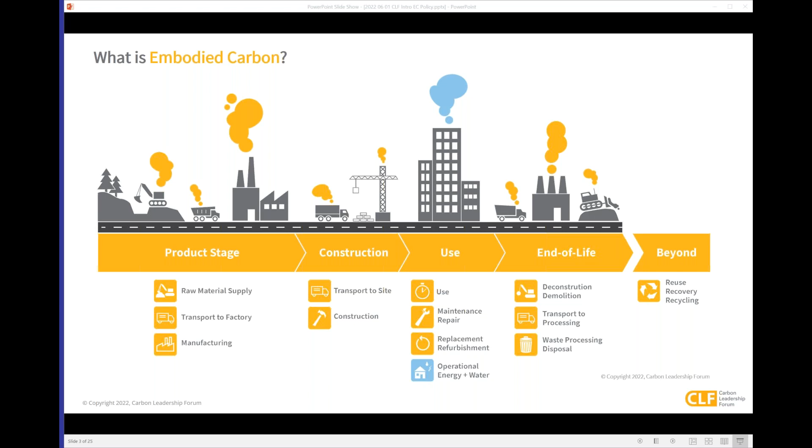I'm still getting a note that says nobody sees my slides. Do you guys see a slide that has factories on it? Not yet, no, we can just see a sign that says constructing and operating buildings has a huge environmental impact. There we go, what is embodied carbon is at the top. Okay, so I think I have to click two buttons twice every time I advance the slides. So let's...

When we look at a building per se, the total carbon impact of a building is the embodied carbon of making it and the operating carbon of operating it.

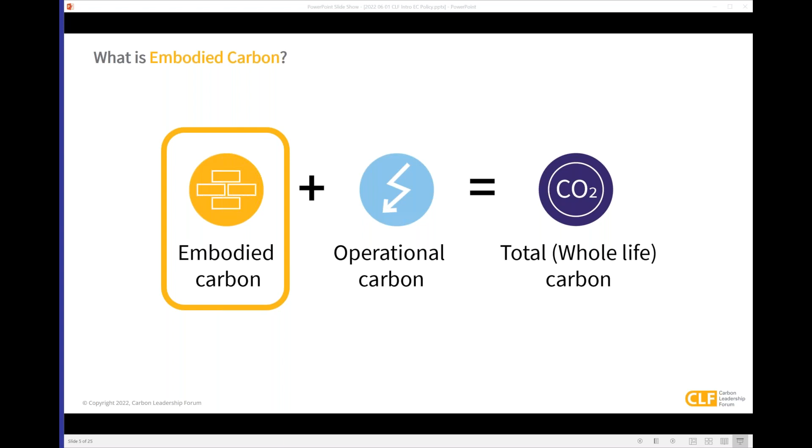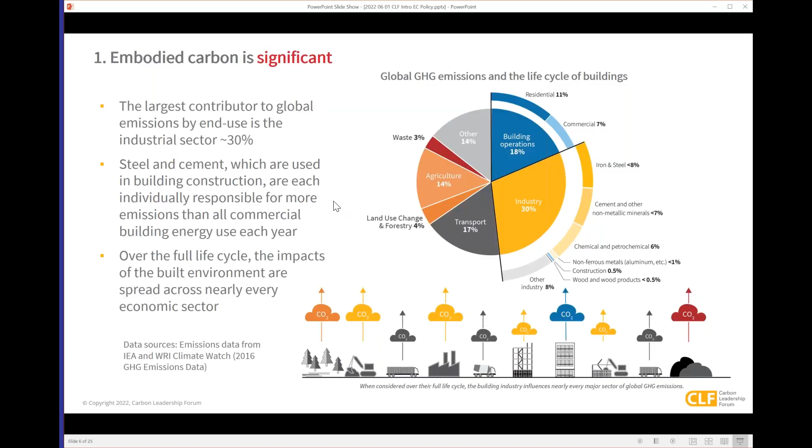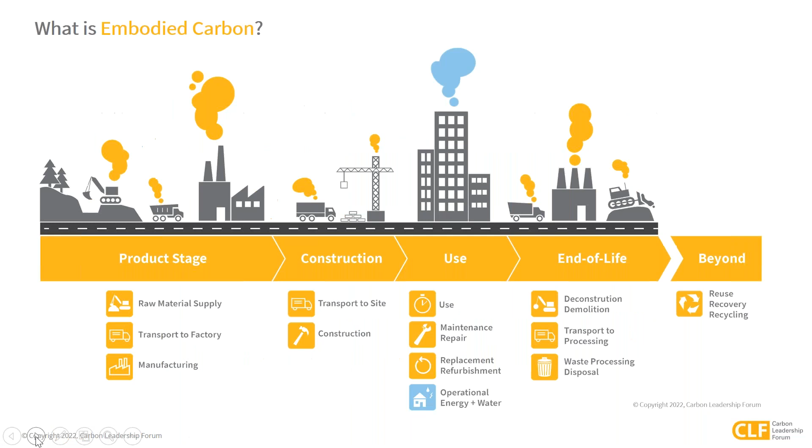We're not on your slide, Kate. I'm sorry to interrupt you, but we're okay. There it is, stop for a second. Okay. We're on the slide now with the pie chart I think you were talking about. Okay, I'm just trying to restart it because I think something's funky. Now, do you see my intro slide? Yes, yes. And now are they moving regularly? Yes. Now, and you see the pie chart? Yep, okay, yes, we can see the pie chart. Thanks, I think this will work now.

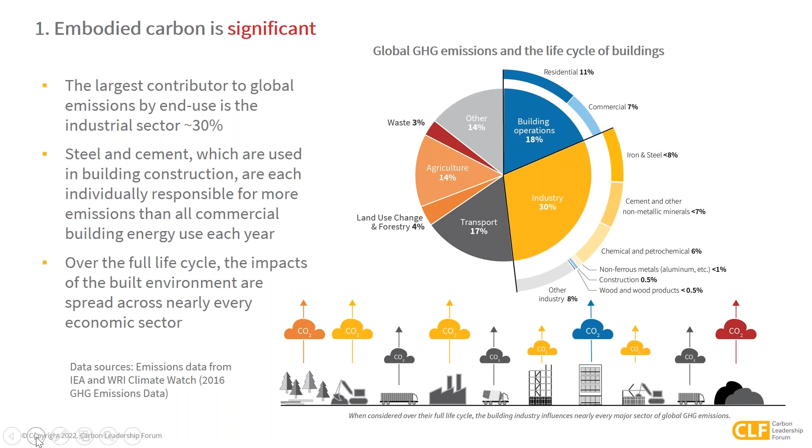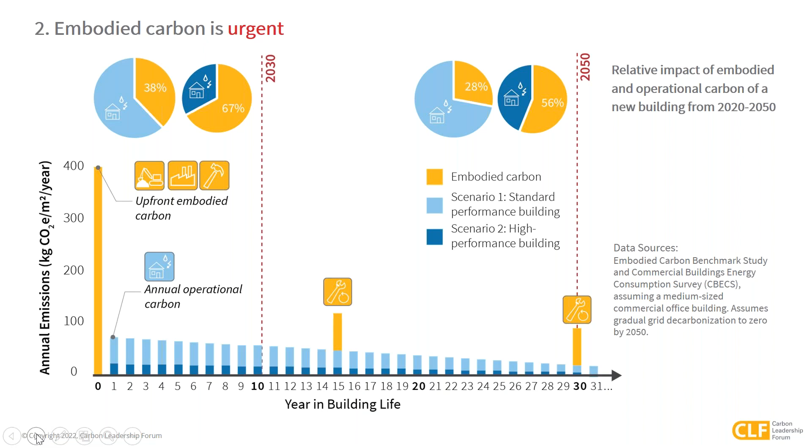When we look at buildings in particular, the focus on reducing embodied carbon is really important because those embodied or material impacts happen up front when we first make a building. The upfront emissions happen in year zero, and then the operating emissions happen over time. So if we're looking to meet global greenhouse gas reduction targets, we need an increased emphasis on the impacts of materials. Additionally, the impacts of material manufacturing are disproportionately impacting frontline communities. When we track reducing emissions from manufacturing from a global greenhouse gas emission perspective, we're also looking at the emissions that are more impacting of local communities as well.

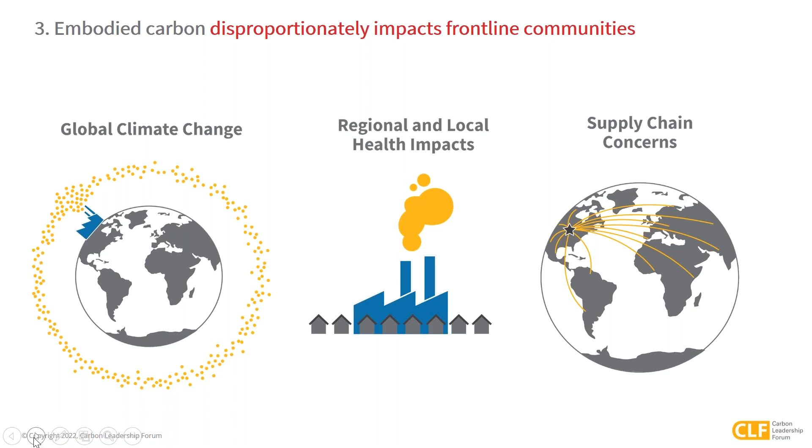So when we're wanting to reduce embodied carbon emissions, there's 4 general strategies to do so. One is to build less. If we reuse existing buildings or build smaller buildings or less infrastructure, then we are using less materials and thus less impacts. We can also design lighter and smarter.

So design and engineer to use less materials. There are low carbon material alternatives that would be using switching out from one material to another, so using straw-based materials rather than fossil fuel-based materials. And then the last one is procure lower carbon products, and that's what we're going to be talking about in more detail here today.

So on the market today, there are products that are similar or nearly identical in performance, but their manufacturing impacts are less, so they have a lower embodied carbon.

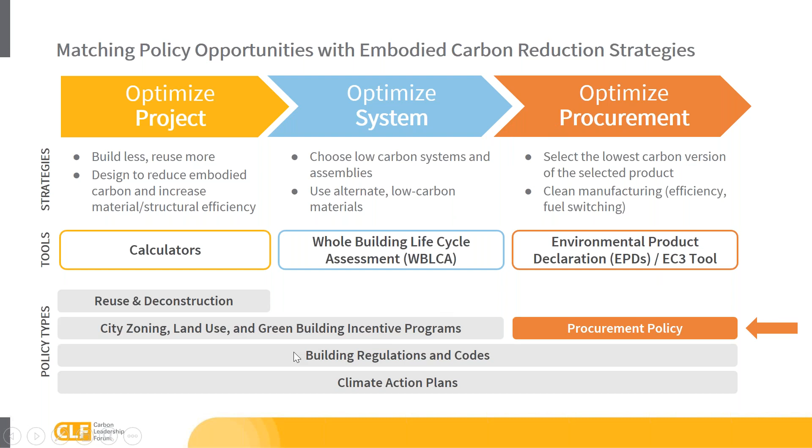So there's a range of different policy opportunities depending on what your embodied carbon reduction strategy is. And if you're wanting to optimize procurement, there are a range of policies that are really focused on specifically selecting lower carbon versions of a specific product and incentivizing clean manufacturing, which means efficient systems or low carbon energy sources. And the most common way of addressing optimizing procurement policy is through the use of environmental product declarations and what is commonly called buy clean policies.

From a procurement perspective, one of the exciting things about looking at that is that public policy or public procurement is one of the largest areas of consuming of both cement and steel. So nearly half of all cement purchased in the US is done with public dollars. And about a third of the embodied carbon emissions of construction in the US over a previous decade can be attributed to public projects. So public procurement can be a way to help incentivize and motivate market transformation by rewarding low carbon material solutions, and it can also help align purchasing with broader environmental, labor, or equity goals.

Another argument for addressing procurement is that it can address what's commonly called a carbon loophole. In many corporate and government carbon accounting practices, there's been a focus on what is called scope 1 and scope 2, the emissions that take place when you actually combust, create energy, but not necessarily tracking the emissions that take place from making things.

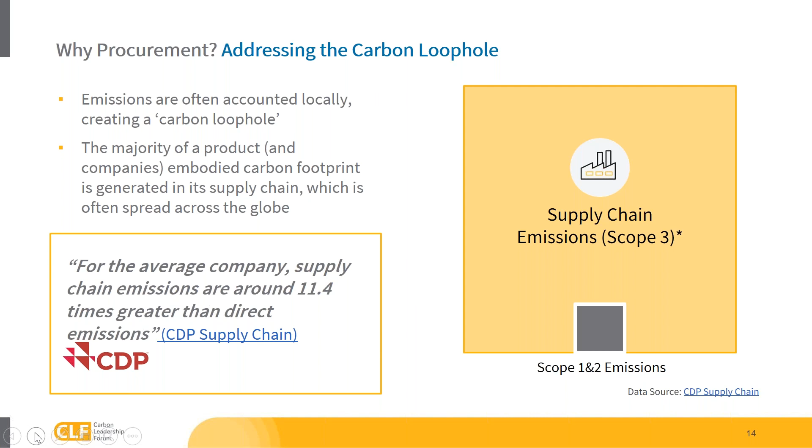So if, for example, a state was tracking the emissions that happen in their state and working to reduce them, you might instead incentivize moving all of your manufacturing out of state, because you would reduce your emissions by not making anything in state, but you purchased things from out of state and brought them in. Those purchased emissions are the scope 3 emissions. And for an average company, supply chain emissions are often more than 10 times the direct emissions that they specifically control.

So I want to give a little bit of a framework of the policy landscape before handing it over to Jordan. Buy Clean policy was first introduced in California in 2017. There's been bills introduced in 8 states, and some passed and some are under pilot stages. The Federal General Services requirement has requirements for concrete and asphalt coming in this year, and there's additional procurement-related policy task forces underway. There's also programs internationally from the Canadian government, as well as the UN, looking to align global procurement policies. And I'll point again to our policy toolkit for more details on this.

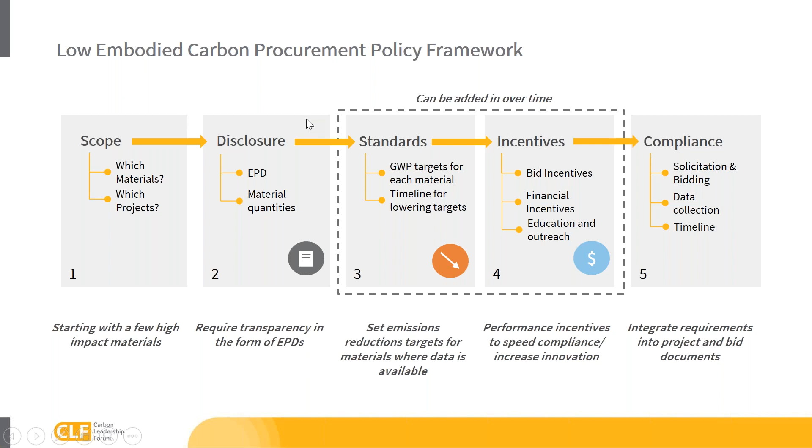One of the interesting things about low embodied carbon procurement policy is that there's a range of levels, ranging from disclosure, so just requiring people to report the impact of the materials that they choose, all the way to setting targets or timelines requiring lowering of those targets over time, or incentives to give financial or other incentives for manufacturers that have lower carbon solutions. So just wanting to share that there's a wide range of action taking place all around.

When implementing those policies, you need to understand at what scale they're being implemented, so which projects are going to be included, and also what materials are going to be covered. So many proposals have included things like just buildings. Other ones include buildings and horizontal infrastructure for transportation projects.

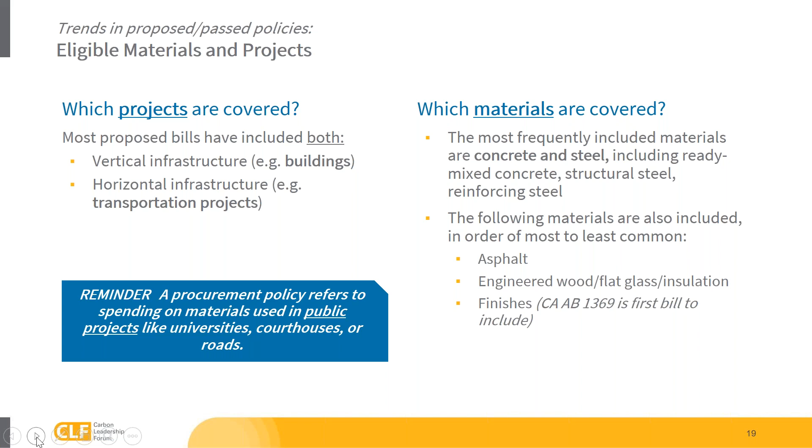Commonly selecting materials either by picking all structural materials, for example concrete, steel, and wood, or identifying materials that are very high carbon impact. Concrete is one of those identified as high impact, and a material that also has significant opportunities for optimization in the mix design.

Procurement policies typically use environmental product declarations, which report the carbon footprint of the product, in this case a concrete mix. So here, one cubic meter of concrete would have a carbon footprint, or global warming potential, of 445 kilograms of CO2. With each EPD giving you the carbon footprint of that mix, you can use that to specify or require mixes that meet a carbon footprint target.

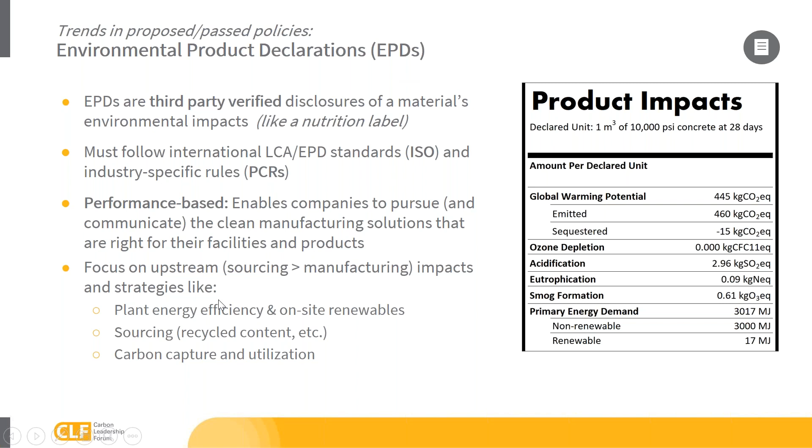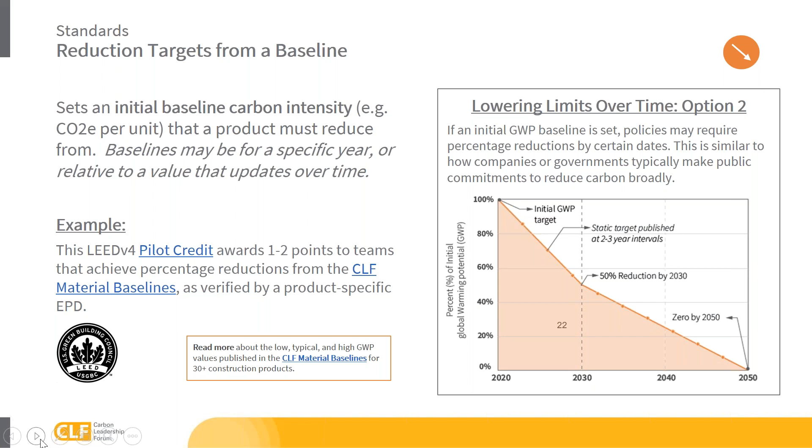There's a range of different policies and strategies about how to do that, ranging from targets, limits, and incentives. I want to highlight that as you implement policies that are difficult to comply with, we predict they'll be less successful, both in terms of being difficult to implement and also in lower actual embodied carbon reductions. So there's a range of tactics to help facilitate compliance and increase success: providing education and training, pilot projects, and others.

So that's an overview. I think we were going to hand it to Jordan next, or see if there were any specific questions now, since I'm leaving on the half hour.

Teresa, are there any questions for Kate? I don't see any right now in the chat. Oh, we do have one. Let's see.

Someone noticed that on the EPD slide, there is a line item for sequestered carbon. Is this a new item in the PCR?

It all depends. No, there's not been a recent change in the product category rule for reporting environmental EPDs. I'm not sure exactly what they're noting here, but for concrete in particular, no. But there is, in an EPD for wood products, and there's likely to be evolving standards around that, that being whether or not you're storing carbon in the material. That's a simple, incomplete answer to a very complicated and interesting question.

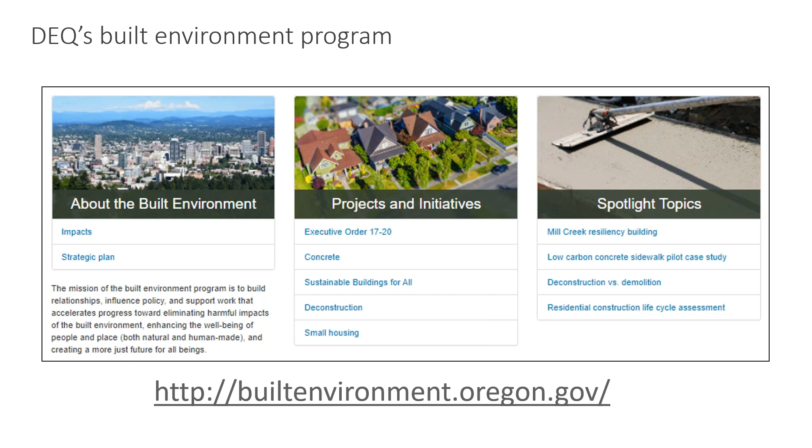Today I'm going to give some background on our work on concrete. We're going to discuss some local and statewide procurement policies, talk about pilot projects, and finish out with some lessons learned so that all 200 of you on the webinar today could take some lessons back to your part of the world.

Let's talk about the background of how we got into this work here in Oregon. As far back as 2010, we produced a consumption-based greenhouse gas inventory for the state of Oregon. In this inventory, we can see that embodied carbon of building materials comprises about 8% of all annual emissions in Oregon.

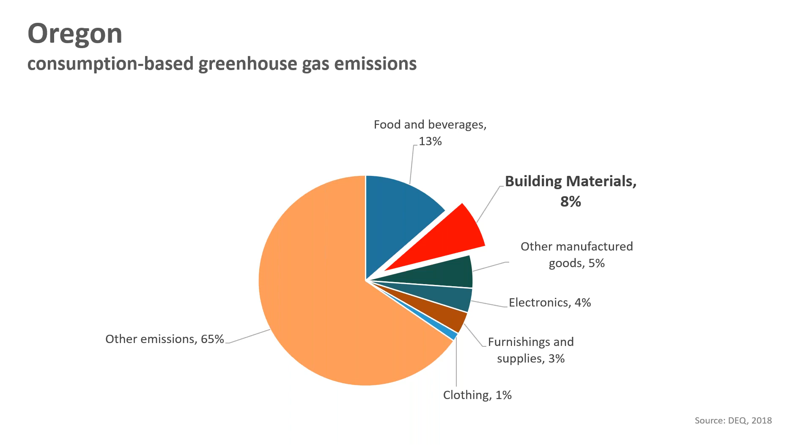This clearly shows that building materials matter, but it was also clear that other materials like food and beverages, electronics, furnishings, and clothing also mattered. In order to engage with these diverse sectors, we started a project with the Oregon Sustainability Board back in 2014 to convene businesses across Oregon to talk with them about how to both measure and reduce the carbon footprint of the products they produce here.

We published our research results in a report, and all these links will be available to everybody afterwards with the slides. This report came out in December of 2014, and the findings are that as we interviewed businesses across Oregon, we found the main barriers to carbon footprinting.

The main barriers to carbon footprinting for businesses are, number one, resources—both the time and money to do this for their products. Number two, they needed clear guidance and education on how to do the work. Using life cycle assessment as a tool to measure the impacts of your products, and then disclosing that information, is still new work for many people. Number three, we heard a strong need for standardization to ensure fair and accurate footprinting, which is still something that we hear today.

This research really turned into our playbook for creating a valuable program within these different product sectors. After this report, much of the work of my agency started focusing on the food sector and the built environment sector. Today, for this talk, we're really just talking about built environment and specifically concrete.

So why concrete? Kate talked about how concrete has really high emissions. That's the same case here in Oregon. But we also have the available materials and methods to significantly lower those carbon emissions. Many, but not all, of these methods to lower emissions are cost neutral on a mix by mix basis—we'll talk about this a little bit more. And finally, we had a really engaged concrete industry here locally that really wanted to be a part of the solution and not just a part of the problem.

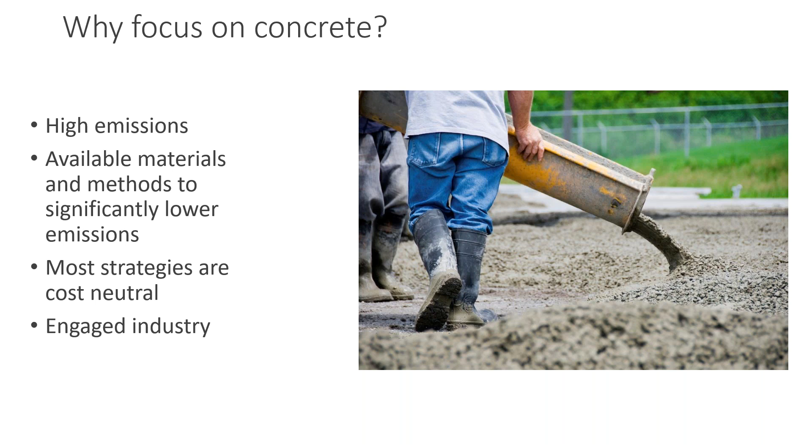Taking one step back to re-emphasize what Kate was talking about, when we look at global emissions, concrete comprises about 8% of it. This is really important, and it's important for everybody. We know for climate change, every single slice of this pie, we need to decrease by about half in the next 8 years, and then again down to zero by 2050.

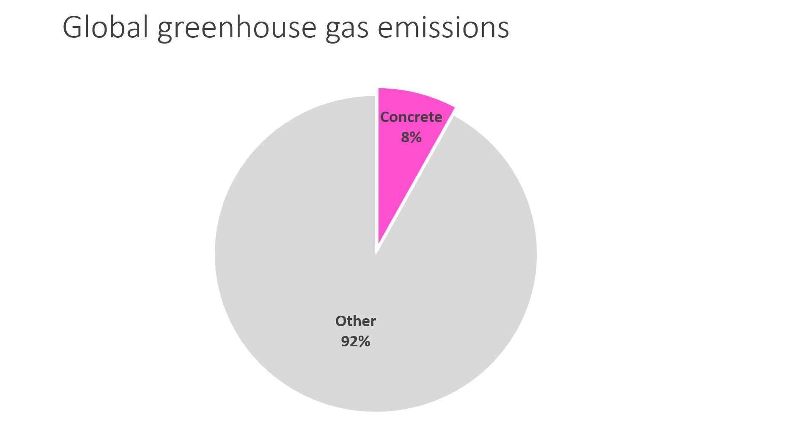For concrete in particular, when we look at the carbon footprint of a typical concrete mix, we see that the vast majority of that carbon footprint is in the cement. The cement is the binder that really glues all the rocks together. When you make cement from limestone, it takes a lot of fuel to heat up the kiln, and it also releases a chemical reaction of carbon dioxide into the atmosphere. So you get a double whammy when making cement—lots of fuel use and also chemical carbon dioxide coming off the limestone when it's being heated.

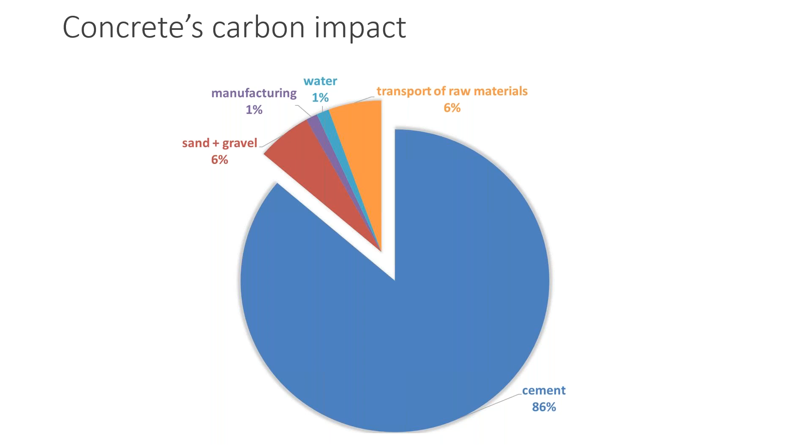The primary method for reducing the carbon footprint of concrete is to use less cement. When you're using less cement, you're really using supplementary cementitious materials instead. Most of these are industrial byproducts, things like slag and fly ash. We're starting to see other things being used, like metakaolin clay, also ground glass pozzolan, which we'll talk about a little later today.

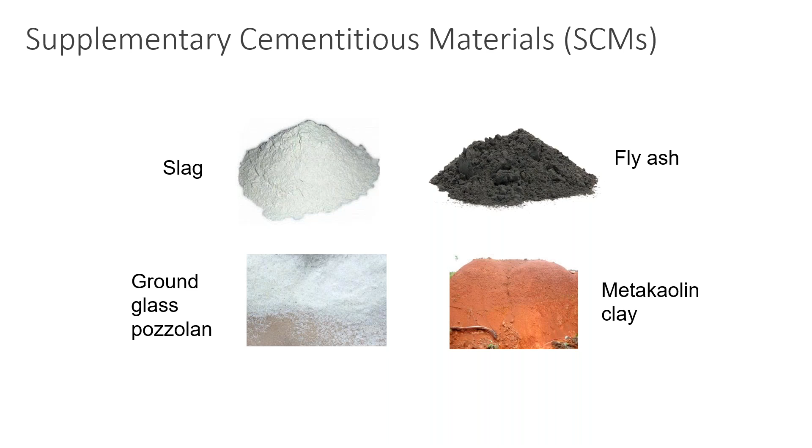Here in the state of Oregon, we're now seeing natural pozzolans being used, which is basically old volcanic ash, being used as a cement substitute. So there's lots of ways - these are just a couple of the main ways. We're not going to get into the nitty-gritty details, but there's lots of ways to reduce the carbon footprint of concrete. We were pretty excited about all these different opportunities.

So we designed a voluntary program in partnership with the Oregon Concrete and Aggregate Producers Association to help concrete producers across Oregon develop environmental product declarations, or EPDs, which Kate talked about. In this program, we aim to directly address the barriers to product footprinting that we found out in our previous research. We did this by providing direct financial reimbursements for published EPDs, direct technical assistance to help actually create the EPDs, and plenty of education on how to use EPDs for both internal and external purposes.

We had really great partnerships with the Concrete Association, and worked with plenty of really smart concrete producers across the state in the program - really impressed with all the folks we worked with. We ran this voluntary program for about 3 years. Overall, the program was a success. We worked with 10 different companies, over 21 different central batch plants, producing about 1,500 EPDs across the state.

Now, the goal of this program was pretty straightforward - we just wanted to get EPDs on the market. More existing EPDs on the market would help project level decisions on choosing lower carbon mixes, but it would also help support broader policies.

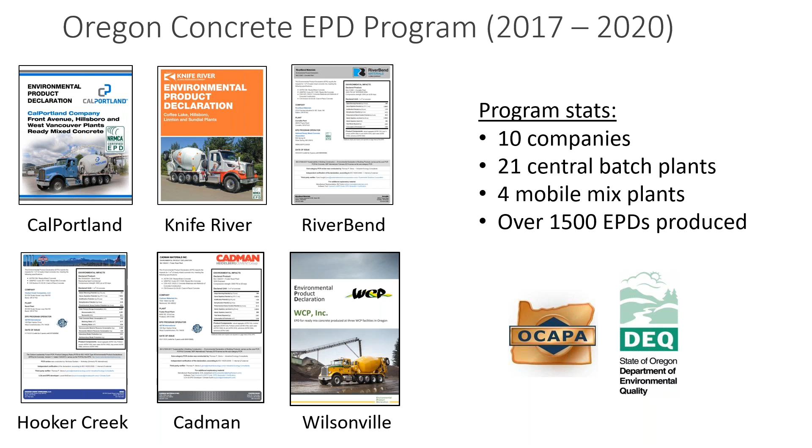So speaking of policies, let's move on to talk about a few policies on the market here in Oregon. I'm going to start in chronological order. Back in 2017, Oregon Governor Kate Brown signed an executive order, Executive Order 1720, to address the built environment's climate impacts. One part of this order directs newly constructed state buildings to consult with my agency, Oregon DEQ, on options to reduce embodied carbon.

Although our work with state building projects has been a little bit slow, I'm highlighting this policy because some executive orders can hold a lot of weight. You heard Kate talk about the federal GSA work on concrete and asphalt, and all of that work stemmed from an executive order. Now, EPDs are required for concrete and asphalt for federal buildings, and they've set carbon limits for concrete as well.

So some executive orders can move policy quickly. Moving on to the city level - back in 2019, the City of Portland published a procurement policy that focused on requiring EPDs for the city's purchase of concrete. In January of 2020, they became the first city in North America to require EPDs for all concrete purchases. Literally just last week, they published their carbon thresholds for the different strength classes of concrete, and all projects need to meet those limits starting in January of 2023. For Portland, they put their EPD requirements directly into their construction specifications, which is on the left side of the slide here.

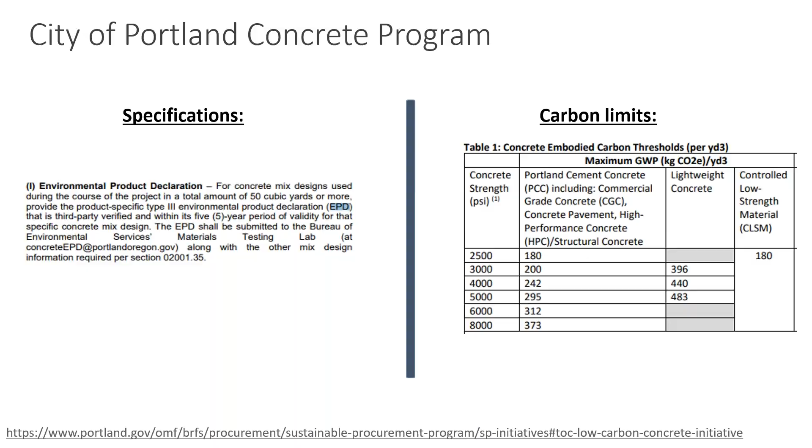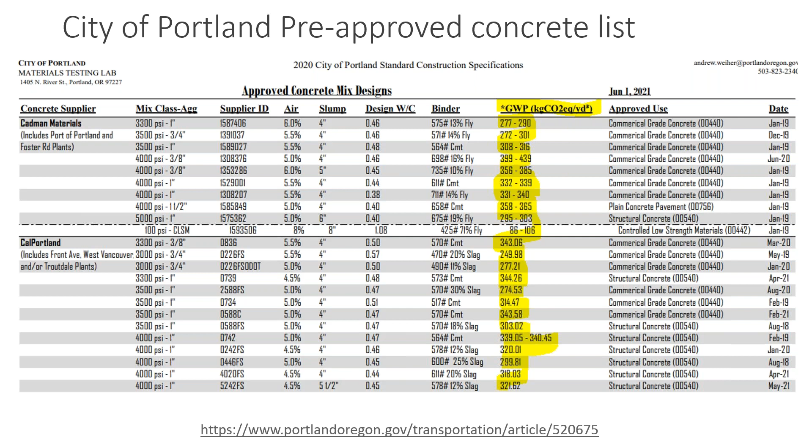The city of Bend recently published a community climate action plan that included an action to utilize low carbon concrete mixes in city projects and also create incentives to encourage developers to utilize low carbon concrete. Based on this plan, city staff have begun looking at past purchases of concrete to establish a baseline of what types of mixes they're already buying.

It's hard to know what your carbon footprint is if you don't start looking at it. This is a great example that demonstrates that you don't necessarily need an entirely new policy to begin work on concrete. Sometimes you just need some staff capacity and some management support to look at the current purchasing practices.

All right, now let's move back up to the state scale. You heard Kate talk about different Buy Clean programs. Oregon is one of only 4 states in the nation that now requires EPDs. In Oregon, they require EPDs for concrete, steel, and asphalt. Specifically, this legislation, House Bill 4139, just passed a few months ago in the February short session, and directs ODOT, the Oregon Department of Transportation, to require EPDs for a selection of projects to lower the embodied carbon of their material purchases.

And like Kate was talking about, ODOT did a greenhouse gas inventory and found out their scope 3 emissions were really high for materials like concrete and asphalt, which is why they're focusing on their purchases. This bill was many years in the making and represents an impressive collaboration among material manufacturers, environmental and labor groups, government agencies, and of course, legislators.

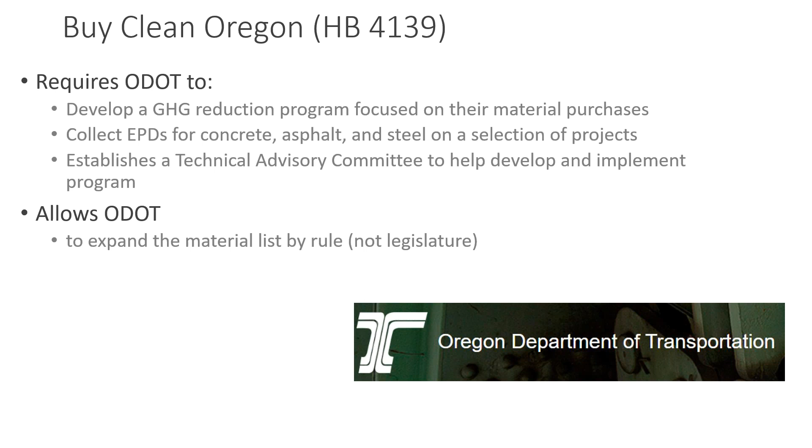All right, let's move on to pilot projects now that we've covered policy. First off, why would you need to do a pilot project? It's important to know that ready-mix concrete is a field-cured material, right? So it's kind of like baking a cake in an outdoor oven. Any changes in ingredients or temperature can affect the outcome that you're aiming for.

One thing we know is that lower carbon mixes have low early strength, and it takes a little bit longer for these mixes to come up to their final target design strength. Now, this does not mean that low carbon mixes decrease the quality or the durability of the concrete, but it may change how the concrete is poured or finished. So therefore, it's really important to engage engineers, contractors, finishers, and of course, concrete producers in a transition to lower carbon mixes. That's why we do pilot projects, because it involves a large chain of people to make this possible.

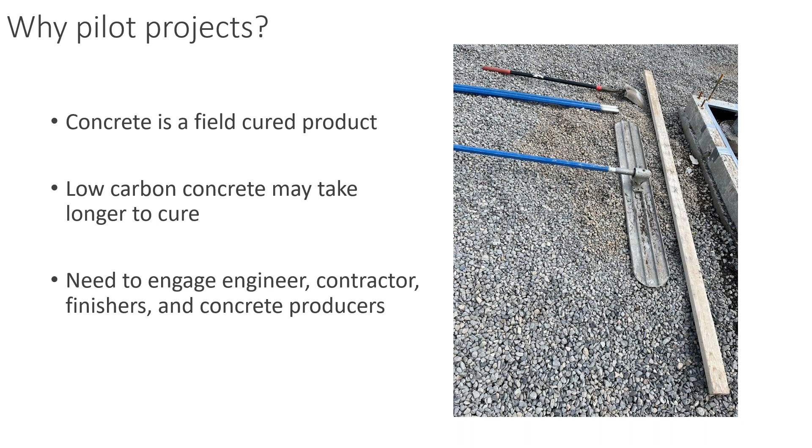The first pilot project I'm going to highlight is on sidewalk ADA ramps within the city of Portland. The goal of this pilot project was to understand how the mixes performed. This was in the summer of 2020. Overall, low carbon mixes on this project met the city's performance specs.

They were really well received by the concrete finishers. They were cost neutral, or in some cases less expensive, and they performed really well in the post-project visual inspections. And they did all of this while reducing the carbon footprint of the average sidewalk by between 25 and 35%.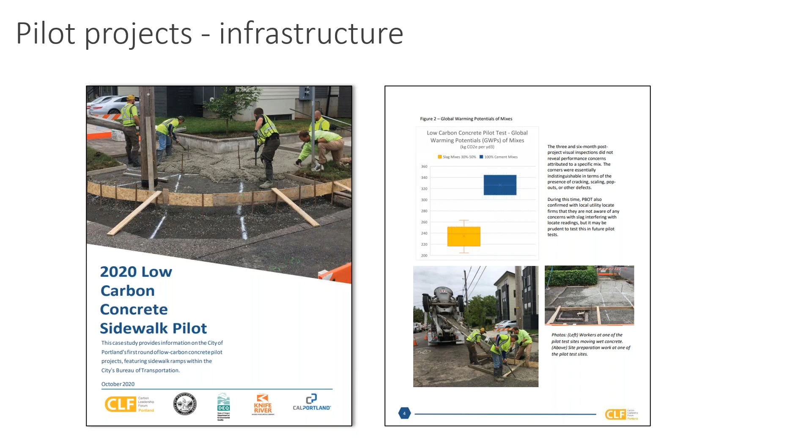We were really fortunate to partner with the city of Portland on this first project. Since then, the city has continued to run pilot projects on their own to demonstrate the various applications for low carbon concrete. Here's a list of the pilot projects they've recently completed. All of their projects are focused on infrastructure applications, and all of these are posted to their website right now. I really encourage you to go check them out.

I want to thank the contractors, the finishers, the city staff, and the concrete producers who have made all of these projects possible, because I think many, many other places in Oregon and beyond are going to benefit from these case studies. A special shout out goes to Stacy Foreman at the City of Portland for her excellent leadership on these projects. I just want to highlight a couple of findings from these projects.

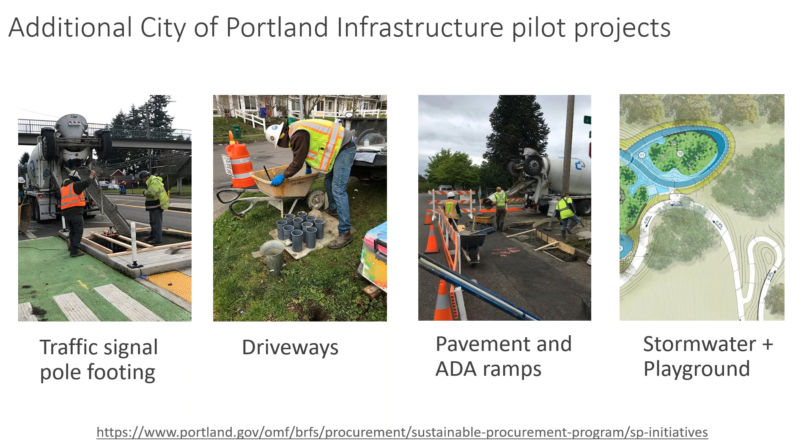Overall, for infrastructure applications tested so far, one thing I can gain from these case studies is that roughly a 25% carbon reduction is achievable with little to no change in project schedule or finishing requirements. However, once you start bumping up to 40% carbon reductions in these different mixes, some may cause schedule delays, especially on flat work applications, and some are really challenging in very cold weather. There are ways to speed up the curing process, but you have to balance those strategies with the contractor's experience.

We're also doing and leading case studies at Oregon DEQ. This is a commercial building project called the Mill Creek Resiliency Building, down in Salem, Oregon, which will house the Oregon State Treasury, which is why we were working on it. This is a resilient building, built to withstand a magnitude 9 earthquake here in the Pacific Northwest. But to make it resilient, the engineering team had to use a lot more materials, so we calculated that the overall embodied carbon of this structure increased by about 25% due to the extra materials. This large upfront embodied carbon footprint really drove the project team to seek deep reductions where possible. We worked with them to lower the carbon of the concrete mixes, reducing overall embodied carbon of concrete by about 25%.

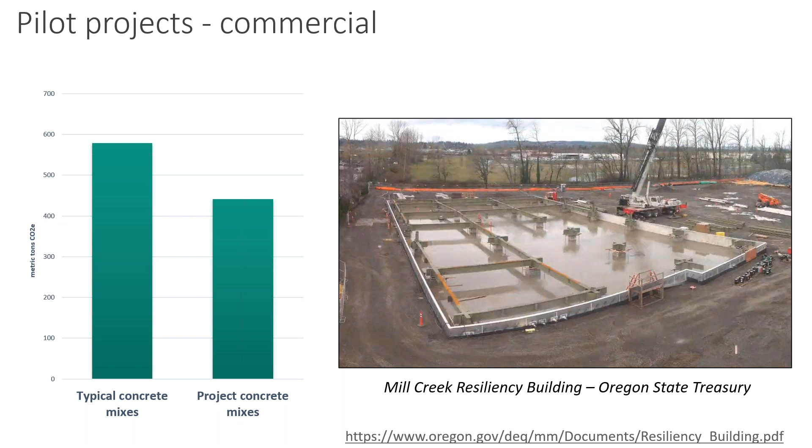We've also been working on a residential project. Here's a couple of pictures from a fun residential project out in Damascus, Oregon. We partnered with Birdsmouth Design Build on pouring concrete mixes that achieved roughly a 40% carbon reduction from the originally planned mixes in this project. This has been a fun one because we're working with residential concrete installers who have never used low carbon mixes, and we're documenting their experience for others to learn from.

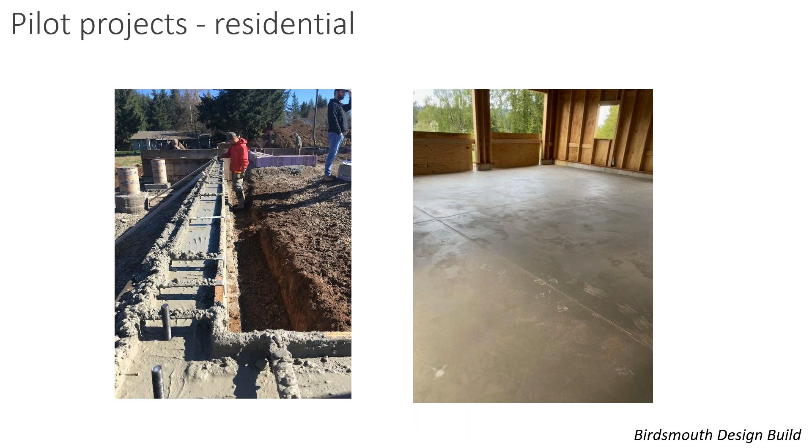We're hoping to publish the findings from this case study in July. The next two slides highlight a pilot project we'd really like to do, but haven't quite lined up. We'd like to test the use of ground glass pozzolan as a cement substitute. You take bottle glass, clean it, and grind it into a very fine powder. When you combine this with ordinary Portland cement, the glass becomes cementitious and can substitute for a portion of the cement. I'm highlighting this because many folks who attend these webinars work in materials management and solid waste fields. Many of you may have glass recycling challenges in your markets, just like we have here in Oregon. So we're hoping to solve two problems at once by supporting ground glass pozzolan in concrete.

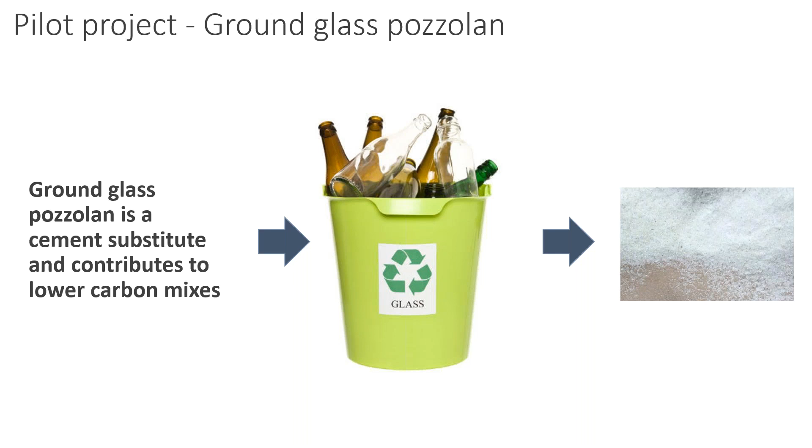All right, I know I'm running short here, so I'm going to try and wrap this up. I've got about 3 slides on lessons learned. Let's go quick.

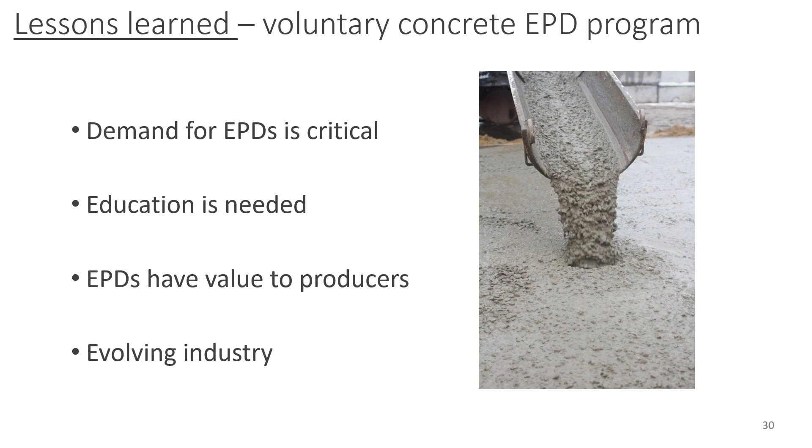Overall, the concrete industry is evolving with numerous new technologies, and we found that relying on a common measurement metric of an EPD really helps focus on the outcomes of these technologies rather than getting distracted by flashy advertising about this new technology versus that one. The EPD is kind of technology neutral, and it just gets to the outcomes. So that's one thing we really like about it.

The next set of lessons learned was on pilot projects and partners we've had along the way in Oregon. We just talked about pilot projects for field cured materials like concrete and asphalt, so I won't repeat myself. But what I will say is that we're aiming for concrete and asphalt first because they're really high carbon materials. If you can tackle these materials, other building products are going to be a lot easier.

Ready to install materials don't take as much engagement with your entire supply chain or construction engagement. For example, there's really no change in construction practices when you're installing low carbon rebar or low carbon drywall or low carbon insulation. So other materials may be a little easier.

The next lesson is about the immense value of engaging stakeholders in this work. Put bluntly, you can't do this alone, nor should you. I've learned so much from the concrete producers that I've worked with, the engineers, the architects, the public employees. And what I've typically found is that you're going to find many allies in every single stakeholder group, because understanding the carbon in our building products is a pretty logical first step to knowing how to reduce the carbon in our building products.

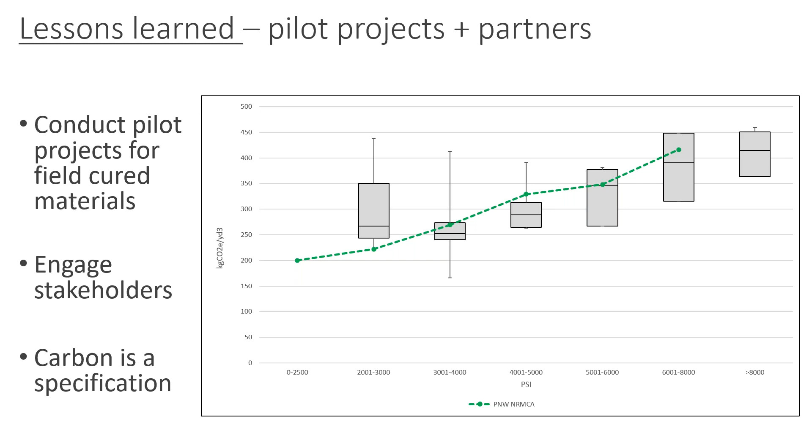Another point is about what to do during the year 1 disclosure period. It's really a great time to build relationships, look at past purchases, and conduct pilot projects if possible.

Finally, and this will lead into Dorian's presentation, I think the most important lesson learned is to act now. You've likely noticed earlier in the presentation that we at Oregon DEQ have been laying down the policy breadcrumbs for many years, beginning with our statewide consumption-based greenhouse gas inventory. But today, I would argue that not everyone needs to do this. There's sufficient information already to justify action on purchasing lower carbon building materials.

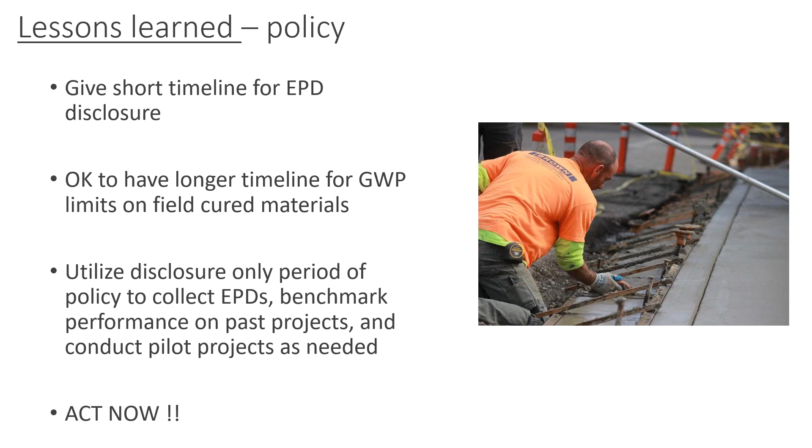Remember, in some cases, you do not need a fancy policy. You just need a motivated staff member and some management support to begin exploring some of your past purchases and looking for areas of improvement. So that's where I'm going to end it. Thanks so much for your time, and I'll stop here.

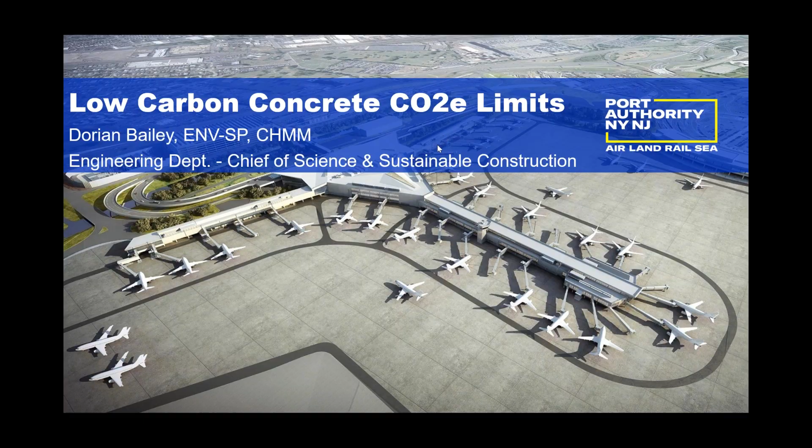I might need a little bit of help on advancing. There we go. Okay, so this is some background on the Port Authority's Clean Construction Program.

Back in September 2020, the Port Authority announced this program. There was a press release. What we were essentially coming forward publicly with is how we're moving forward with our construction business. We are trying to change business as usual to a manner that's much more environmentally conscious.

One of the things we announced and are incorporating is additional use of LEED and Envision. If folks don't know Envision, it's the infrastructure side of LEED. It's not from the same entity, but it's from the Institute for Sustainable Infrastructure, I believe, for Envision. That's a program that helps us go after credits to make sure we're doing things comparable to a LEED silver, platinum, or bronze level.

Back in 2020, we also made an instantaneous change to our low carbon concrete specification. The Port Authority's existing concrete specification allows for up to 400 pounds of Portland cement. We realized that some of our mass pour work could actually benefit from a further reduction, so for mass pour work, we are now working with a 300 pound limit. That brought us down by about 25%, right off the bat in September 2020.

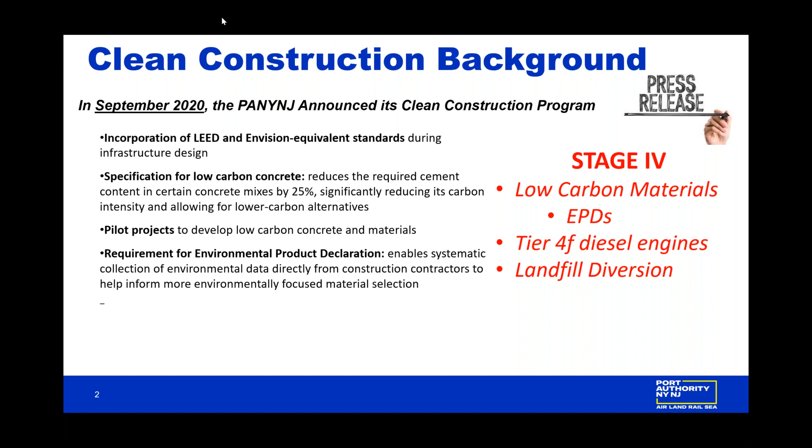So from September 2020, we moved over to June 2021, where we had a little catchy press release saying that we were cementing our commitments to clean construction. This was an announcement from June 2021 where we engaged the resources of local universities to help us really get a better feel for what our existing carbon baseline is for our concrete mixes and to see where we could go with it.

Then in October 2021, we came out as an agency with our overall net zero goals and climate ambitions. As Kate was mentioning, there is this concept of a carbon accounting gap where these upstream emissions, the emissions of the products we purchase, are not being actually captured in our existing agency-wide greenhouse gas emissions inventory. But we believe that by capturing these emissions now, and maybe handling them outside of our inventory, we can really start to push down our embodied carbon values for our concrete, asphalt, and construction materials overall.

This is going to be publicly available on our website shortly. Most of Jordan and Kate's conversations were about the provision of EPDs. Over here on the East Coast, we know that EPDs are not out there for all of our concrete suppliers. So in the interest of competition, and just kind of getting the concrete suppliers acclimated to this new environment, we've come up with something that's completely different from what you may have heard in other talks of this nature.

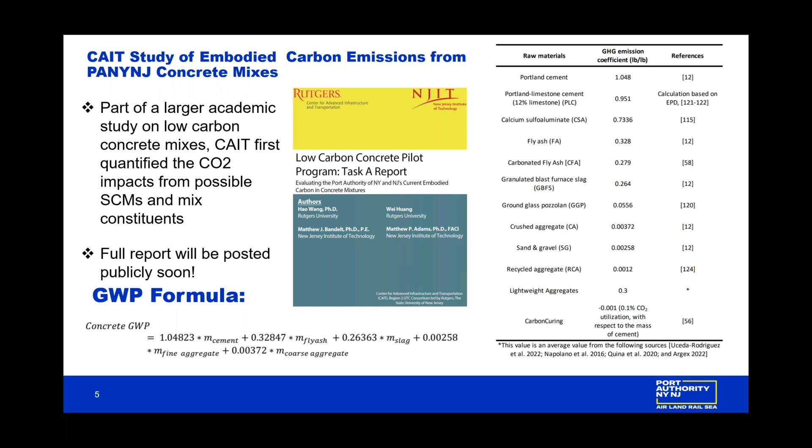So again, it's another listing of the factors here. Really, I think some people get stymied by the fact that, well, we use XYZ manufacturer and they don't have any EPDs available, so we have no clue what this looks like. By the Port Authority funding this work, I think it could give industry the ability to benchmark their concrete, even if you don't have an EPD.

The way the Port Authority specification is written currently in that Division 1 clause for the provision of EPDs, we are viewing EPDs as the gold standard, but to prevent the delay of this work from our construction contracting partners saying that we can't get you EPDs, we are going to allow this formula just so that the Port Authority can have a better indication of what the A1 emissions are - and again, the A1 emissions, that's the calcination reaction from the production of cement. It's really where 85% of these emissions reside when you're dealing with concrete. So it's the cement, again, in the concrete that's driving this.

But you can see, based again on the chart, that there's other contributions from even if you're using fly ash, if you're using slag - we all view these as byproducts or co-products from different manufacturing industries. The way the formula was, or the way the determination was made for the greenhouse gas coefficients for these industry byproducts, actually we used an economic allocation method.

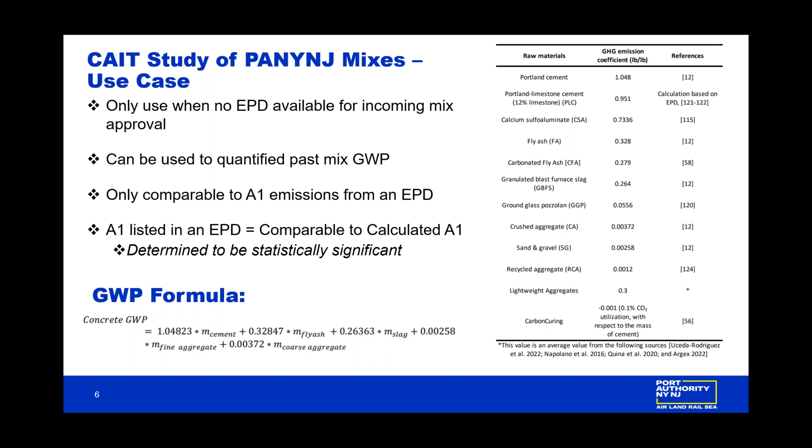So the way the Port Authority is approaching the concept of limits for our concrete mixes is exclusively for the A1 emissions. EPDs are reflective of A1 to A3 emissions.

But the things that the Port Authority has control over are the raw mix ingredients. The way our agency operates is the wonderful folks in our materials engineering unit actually do approve every single concrete mix that comes through our door. And much to Jordan's point, what we're getting at is just having CO2 as being another specification requirement.

Our default concrete specification is performance-based. And what we're just going to do is include as a subsidiary a CO2 limit. So again, primarily the agency is focused on the performance of the concrete and knowing that these mixes will perform, but we are now starting to draw in this secondary metric for what is the CO2 content.

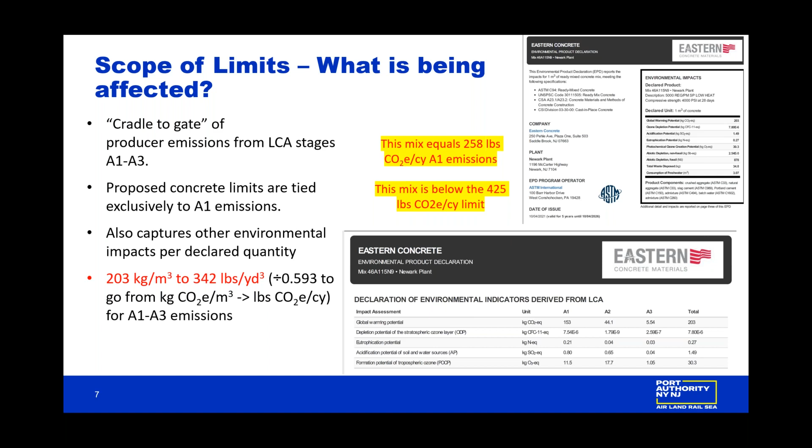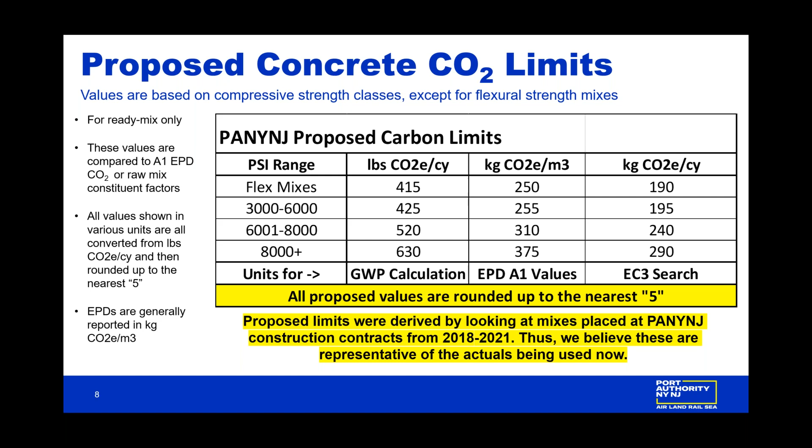So this is just some duplicate information that I've already covered. We will be in the region right now, New York and New Jersey. Portland limestone cement is all over the marketplace, so we are accepting that as a new material now, and we are doing the subsequent accounting, which further drives down the GWP by about 10% based on those factors. So that was already included in there.

We also had emissions coefficients pound per pound for the ground glass pozzolans, which we'll be sharing too. We've also been looking at CO2 impregnated fly ash. We're doing a lot of things to figure out, beyond SCMs, what else we can do to reduce our GWP of our concrete mixes.

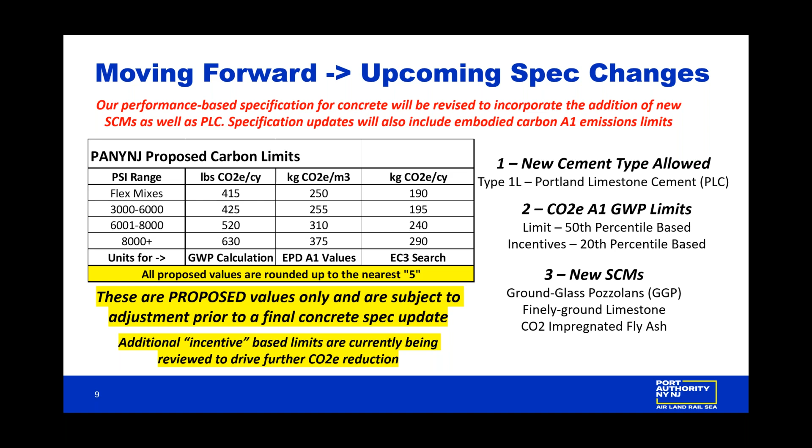And that was all I had. Thank you.